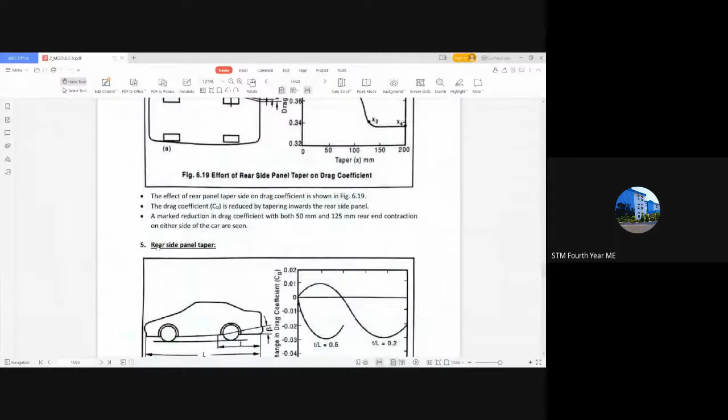Rear side panel taper. To find the rear side panel taper, you have to look at the top view of the car. At the top view of the car you can see there will be an inclination provided here. After the side cambering comes, there will be a small inclination provided at the rear side. It is at the side of the vehicle rather than the rear end, but it is the rear part, and it is the side of the vehicle.

At the side of the vehicle, you are providing a small inclination, and you can see various points provided here: x1, x2, x3, and x4, each showing an inclination. These are the inclinations provided. This is the drag coefficient, and the taper is provided along the x-axis in mm. So x2 is the point at which taper is provided at 50 mm, x3 at about 120 or 130 mm, and x4 at 200 mm.

You can see the coefficient of drag decreases from x1 to x2. At x1, with no taper angle, the coefficient of drag is 0.4, and it reduces to 0.38 at x2, where about a 50 mm taper is provided. Moving on to x3, the coefficient of drag is again lowered to 0.34. Comparing x3 and x4, any further reduction gives a constant coefficient of drag value, 0.34.

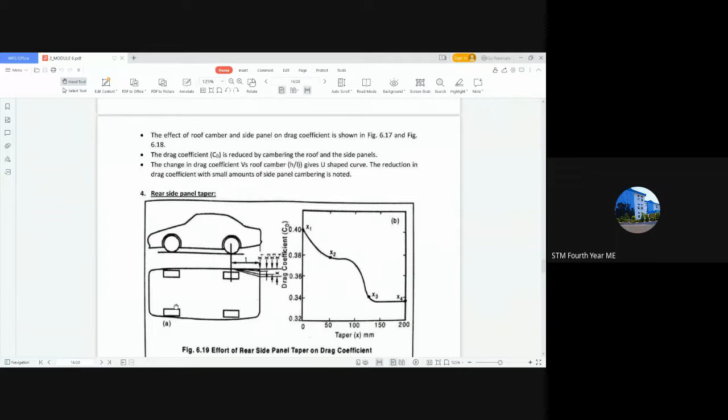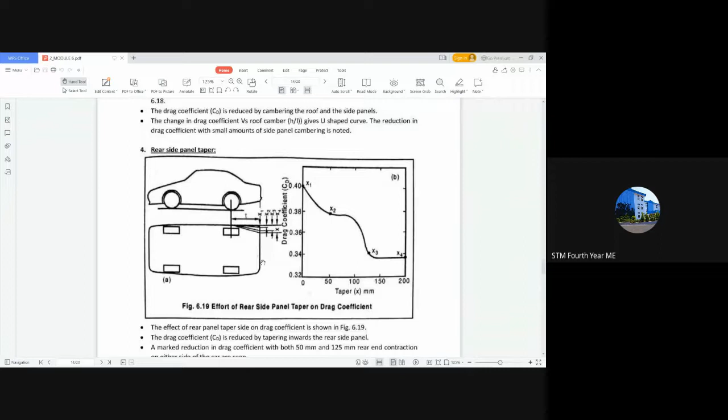That is because of the rear of the vehicle, which we'll discuss next. You can see the area is decreased here, and due to that, base drag decreases. So that is what is affecting rear side panel taper.

Next is the rear end panel taper. This is not a side, it is a rear end panel taper. Rear end panel taper is nothing but providing a taper underneath the car. I'll show you.

So this is the rear side taper. You can see the area that is decreasing here. So here comes the side camber, and after the side camber, the area continuously decreases. There is a decrease here, and a taper is provided here, and here also it is provided. So the area of vacuum pressure that is created behind the vehicle is limited to this length.

So this is the rear side taper, and in the rear end taper, you can see the cross-sectional area decreases here, and after this point, after the rear end wheel, we are providing a taper upwards. You can see an inclination provided here.

So the benefit of providing a taper here is nothing but to increase the negative lift. We have to increase the negative lift. So I have already told you the velocity of the air underneath the car will be very high.

At the front of the vehicle it will be low, and the high pressure region will be created here, but underneath the car the high pressure region is always here rather than upwards the car, and hence it will always provide a lift at the center of the car, while we have to provide a negative lift at this portion of the car also. For that purpose we are increasing the area here.

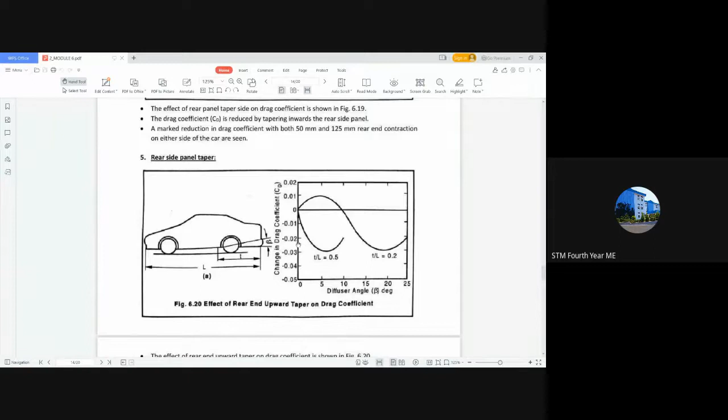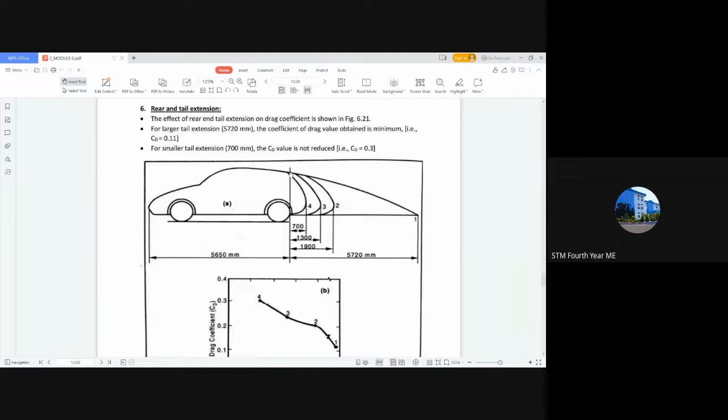We are providing cargo space and all, and for that we provide tail extension as shown in the figure. I will show you another extension. You can see here, this is a form of tail extension, while here the tail extension is much greater. So this is the example for a tail extension, and you can see how CD varies.

Looking here itself, you can see this is the CD at the y-axis, and this is the tail extension in mm. In the first condition, in the fourth condition, you can see the CD value will be much higher, while on increasing it, the CD value decreases.

And at point 1, you can see it will be the most minimum. So what is happening here is nothing but when you are providing no tail extension, the area that is being used for base drag, the area which will be coming under influence for base drag, will be much greater.

So you can look here itself. When there is no tail extension, this is the line that is shown here, and there will be a huge area. But coming to 4, there will be a reduction in that area, 3 a further reduction, 2 another reduction, and at 1 it is 0.

So the 1 is a theoretical concept, and it is not found that much. It is there, but not found that much because it is not ideal for maneuvering the vehicle. But if you are providing it till 1, there will be no disturbance in the airflow. It is in the same shape as that of an aerofoil.

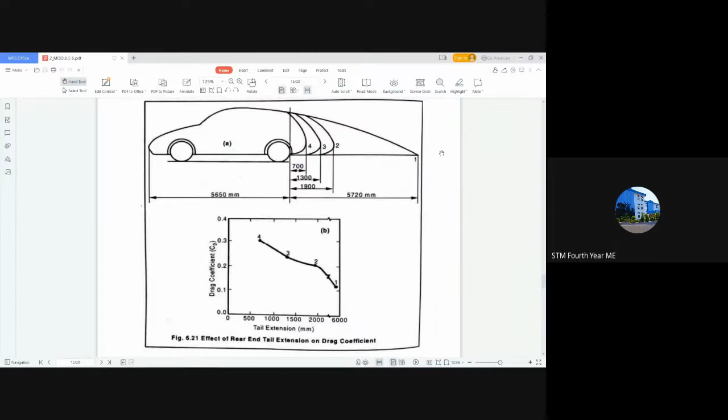And the last one affecting coefficient of drag is underbody roughness. So what is underbody roughness? Underbody roughness is nothing but the various components that are present underneath a car.

If you are looking underneath the car, you can see in conventional vehicles, that is old vehicles, there will be a propeller shaft, differential, the gearbox, and the exhaust pipe, exhaust manifold, catalytic converter, and each and everything is fitted underneath the vehicle.

And air has to pass impinging on all these parts underneath the vehicle. It has to strike each and every part to reach the rear end of the vehicle. From the front end to the rear end, the air has to travel underneath the car, and at each point it has to strike every gap and nook, every hole and cavity, passing through all of that.

So if you are providing such a design, or such a bare exposed underneath part of a car, then the coefficient of drag will be much greater, because the air has to travel by striking at each and every point. But in modern cars, you can always see that every component is mounted above the chassis rather than below it.

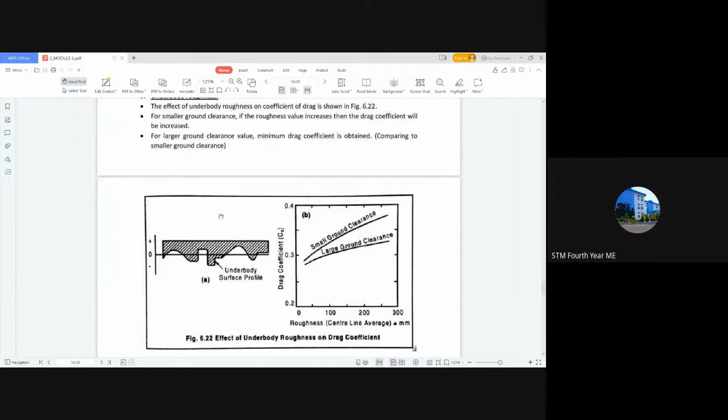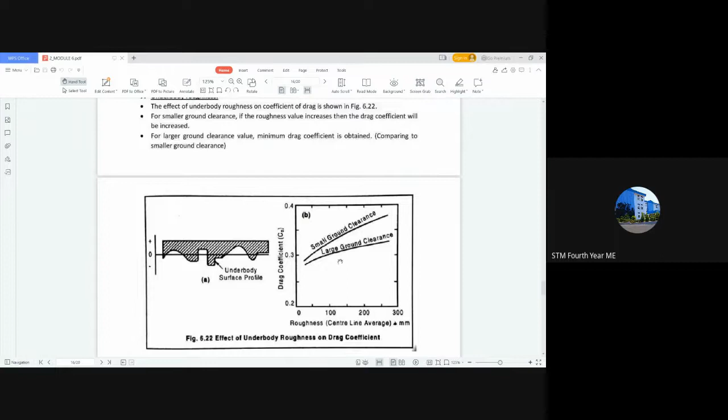So the next topic is about aerodynamic lift control. The last session was on aerodynamic drag, while the next one is on aerodynamic lift control.

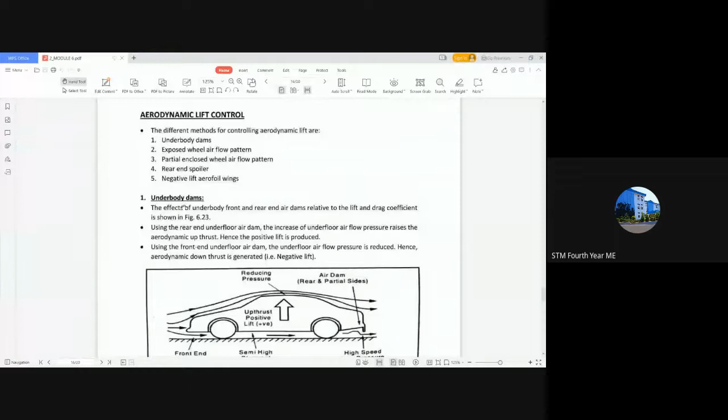The various parts used include underbody dams. So what is an underbody dam? As the term suggests, it is underneath the body, below the body, but it is not underbody roughness, rather dams. So what is the function of a dam?

A dam is nothing but like hydroelectric dams and so on. A dam always prevents something from moving in that particular direction. In the case of a hydroelectric project, it stores the water, or prevents the water from following its natural path of flow, so we are controlling that flow. The same way, we are controlling the airflow pattern, or how the air flows underneath the car.

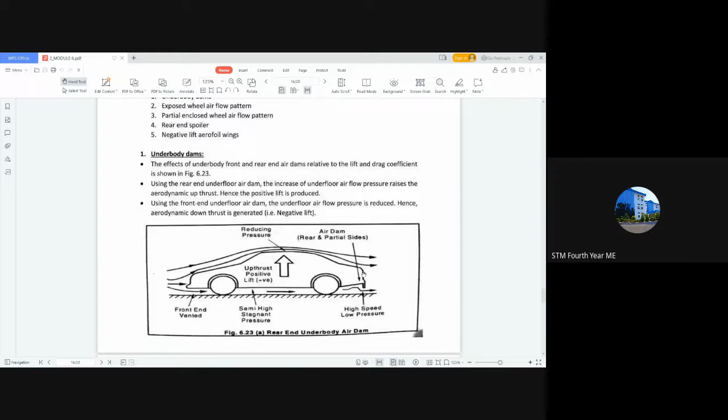So there are two underbody dams that are provided, one at the front end and the other at the rear end. There are two reasons for that.

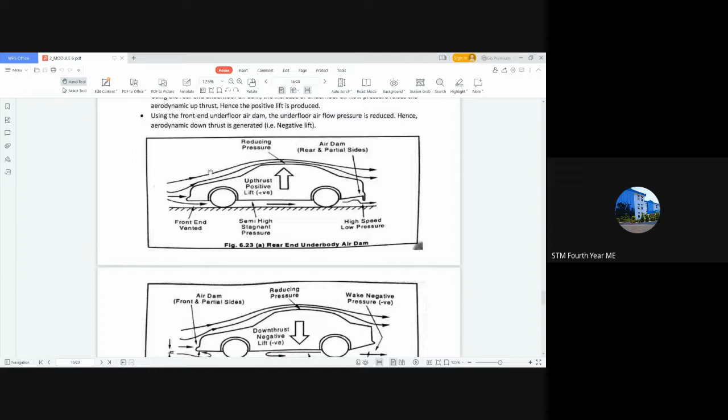At one condition I already told you, in the rear end, if there is a positive lift occurring, it also facilitates the gripping of the front end of the vehicle to the ground. So if there is a positive lift occurring at the rear end, due to this tilting, here it goes upwards, here it will go downwards, and due to that the front end will always be gripping the road. So that is facilitated by the positive lift provided here.

Even if this happens, it doesn't matter, we just have to obtain negative lift at the front of the vehicle. But while tapering the vehicle, we always get negative lift at the rear end and also at the front end. Even if you obtain a positive lift at the rear end, it does not matter.

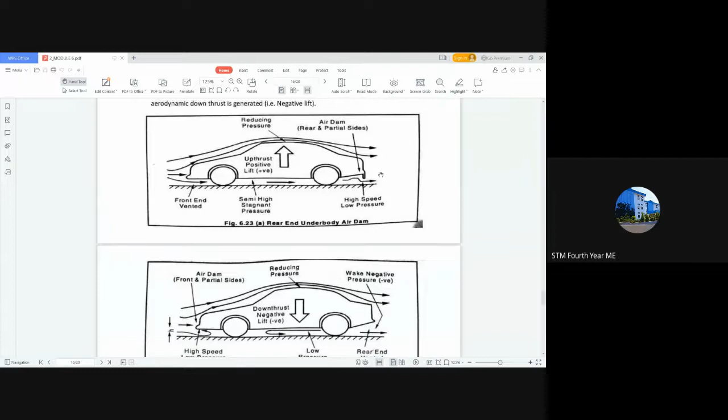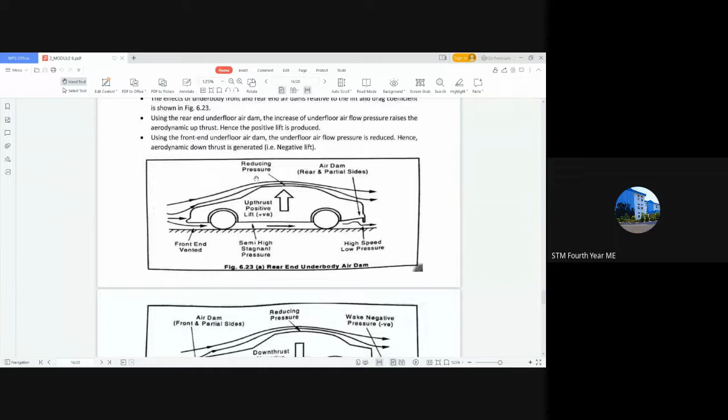And one of the cases is shown here. So we are providing two components here - you can see a bulged section here and another bulged section here. This dam restricts the air entering underneath the car, so it provides the most amount of air to travel over the car, going over the roof of the car rather than underneath it.

When you are directing most of the air above the car, we will obtain higher pressure regions always over the car rather than below the car. That is the function of providing a front end dam. So we restrict that air, and while the air travels here, obviously the velocity will be high and the pressure will be low, but we are reducing the amount of air entering underneath the car.

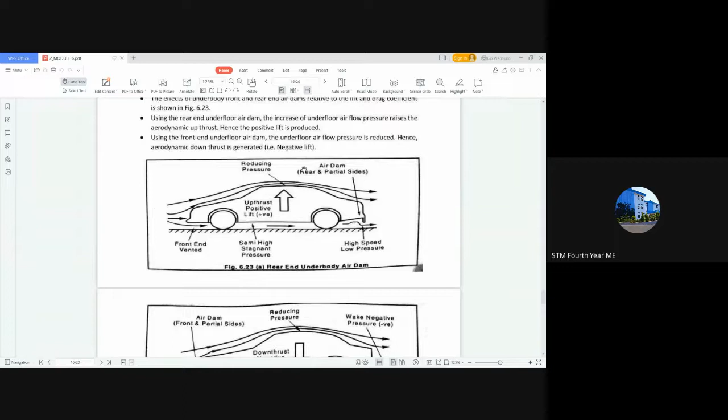Here, for providing positive lift, we are reducing the cross-sectional area, even smaller than this one. So obviously the velocity will be increasing, and a region of high pressure will be created, and a positive lift will occur at the rear. But if you are providing a rear end taper, there will be a negative pressure created here because of the lower pressure here and the higher pressure occurring here - there will be a negative lift.

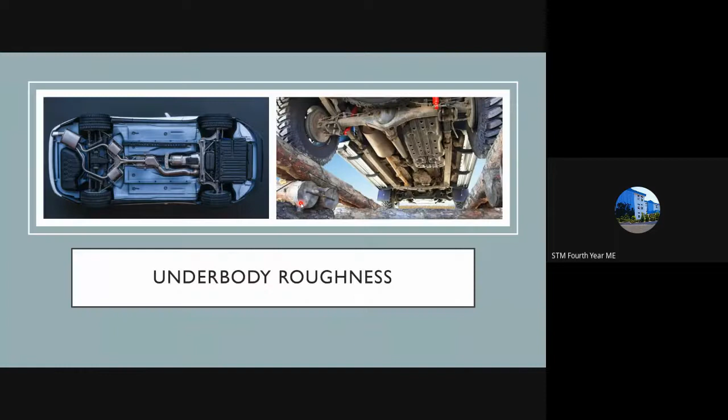So that is how the dams assist in reducing lift. You can see one of the underbody dams provided at the front of the vehicle - this is the underbody dam at the front. This facilitates most of the air to travel upward over the car rather than underneath. Air flows underneath the car, but due to this design, the majority of the air is directed upwards due to this inclined portion provided at the front fender.

So this is one of the underbody dams. And in the case of a taper shown here, that is the underbody dam provided behind the vehicle - such a force occurs due to the lower pressure generated here and the higher pressure generated here.

Okay, one of the components assisting for that is the diffuser. This is the diffuser shown here. If you look at sports model cars, you can see at the rear end there's a component fitted to the car underneath the taper, and this is called a diffuser.

The function of the diffuser is to safely transition the air to the atmosphere. You always know that behind the vehicle there will be a vacuum formed at high speeds, and there will be a turbulent flow. One part of the air that flows above the vehicle comes and falls in this direction, while underneath the car it also forms in this direction, and a region of negative pressure is created here.

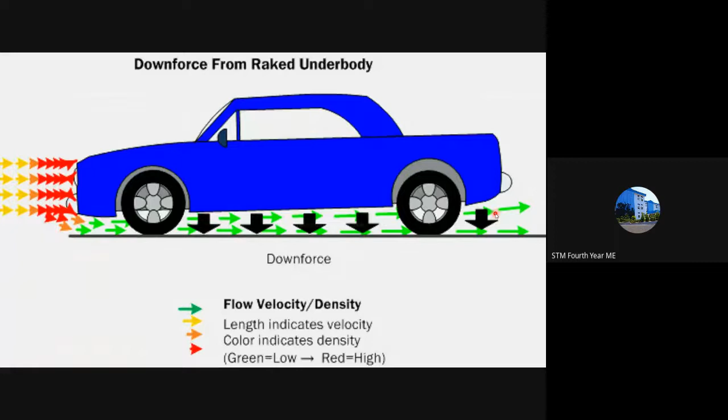For that purpose, if you provide a diffuser, it smoothly transitions the air. At this portion the velocity of air decreases, and we are providing a pathway for that air to move in a safe manner at a lower velocity, to strike the incoming air from the top of the vehicle and smoothly mix with each other. For that purpose, a diffuser is provided.

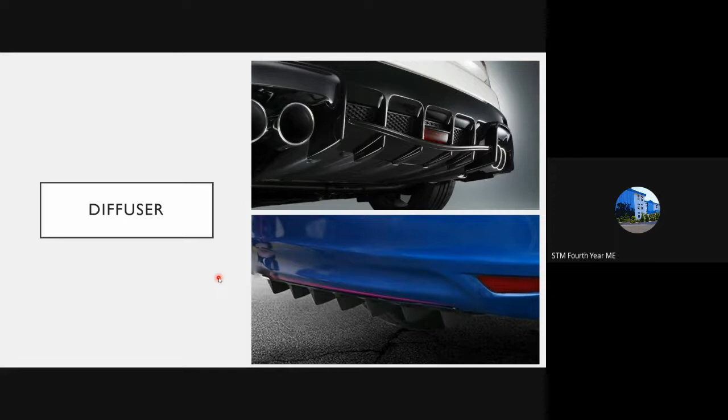So for an underbody dam, we are also providing a diffuser.

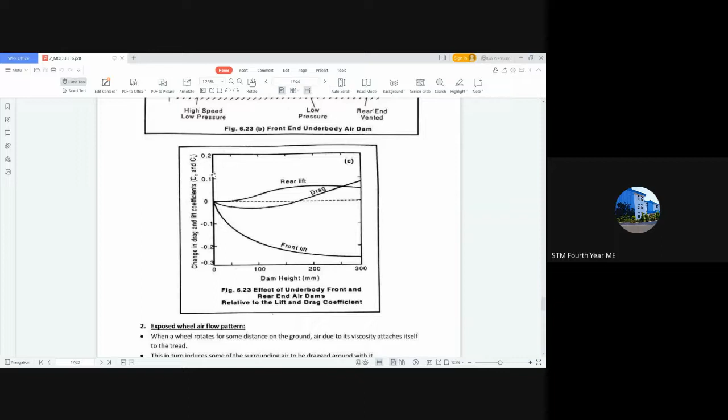Next component: you can see here the drag reduces at this point and then increases, so you can provide a sufficient amount of front dam and rear dam. You can see the front lift is reduced by using a front dam, since the majority of the air always travels to the upward portion of the car rather than the bottom of the car. And the rear lift, you can see, increases.

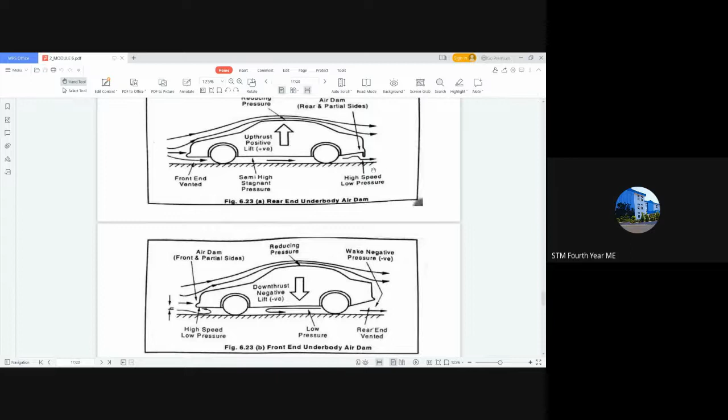Rear lift is increased in this case because a positive upward thrust is formed, while in this other case it is reduced, and you can see it reducing here, a small reduction. That is when using a diffuser. And a major portion, when you taper this, this portion is for the taper, and for this reduction we are using a diffuser, to reduce the rear lift.

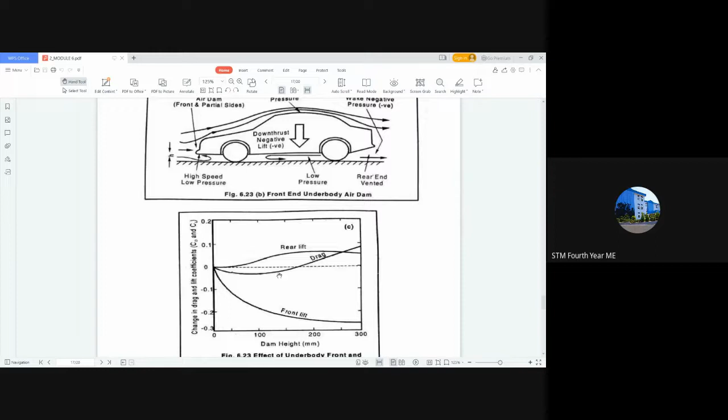So that is what comes under underbody air dam. Next is the exposed wheel airflow pattern.

In the exposed wheel airflow pattern, you have always noticed that the tires or wheels provided in a vehicle are always open wheels. The purpose of providing open wheels rather than enclosed wheels is for the air to travel safely outside - you send the majority of the air encountering the front without restriction smoothly to the sideways rather than underneath the car. If you send it underneath the car, a region of high pressure will be there and lift will occur. To reduce that, we are providing open wheels.

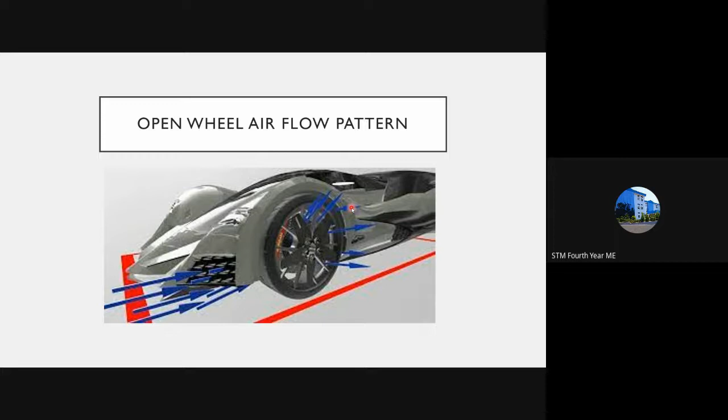In an open wheel condition, this is how the flow occurs. This is a Formula One car, and you can see the air striking the front nose end of the vehicle is then transferred to the atmosphere through the open wheel pattern. So this is how it flows in an open wheel pattern, when we are looking from this direction.

If we look from the front end, there is also a possibility of the air going underneath the car to rotate in this manner due to the rotation of the wheel. So there are two patterns of airflow: first through the open wheel, and another inside the enclosed space of the tire.

So you can see the tire always rotates in this direction, in the forward direction. So it carries a small amount of air in this manner also, and it has to be safely ejected here. You can see, so there will be a design or a pathway provided at this portion of the vehicle to safely produce a small vorticity.

So you can see there's a vortex formed here, and by this vortex or turbulent motion, the air exits from this point. But the majority of the air entering the vehicle, rather than going to the tires, will go underneath the car. So the wheel is only exposed for a small area at the front of the vehicle. The rest of the air always moves underneath the car.

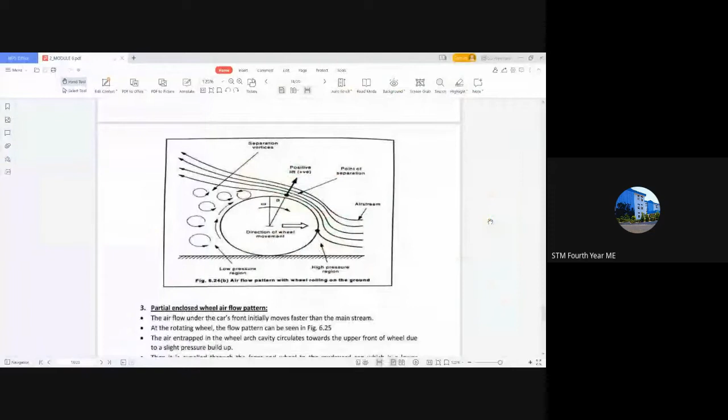So this is how an airflow pattern occurs. This is an open wheel airflow pattern, while this is the enclosed wheel airflow pattern, and that is the partially enclosed wheel airflow pattern which I have discussed.

So when you are looking at the top side, you can see how the turbulent flow is occurring. This is how the turbulent flow occurs here. So once it exits, the vorticity that is formed here is in this manner.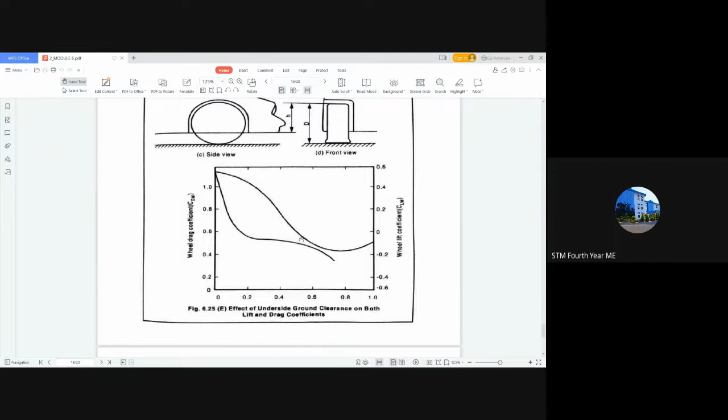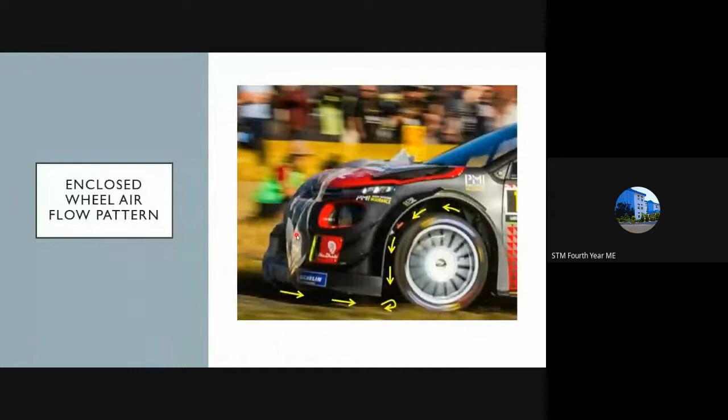And that spoiler, due to this shape, will produce a higher pressure on top of the car rather than below. It provides a higher pressure here due to the high velocity flow, and then there will be a region of low pressure here, and due to that a negative lift is formed at the rear end. That is the function of the spoiler.

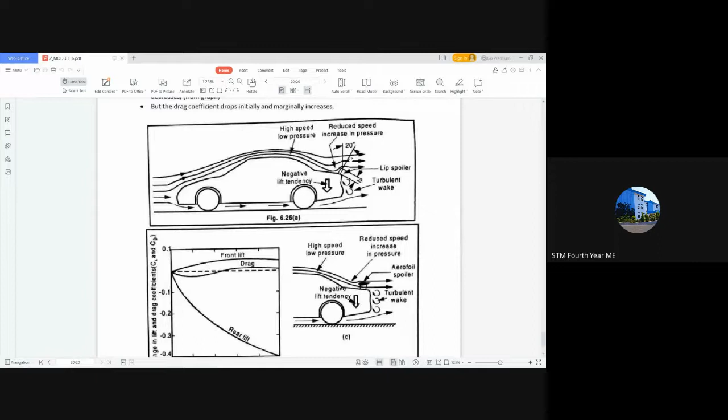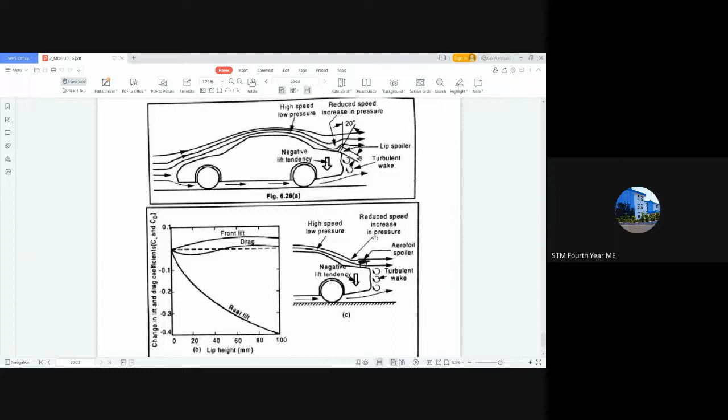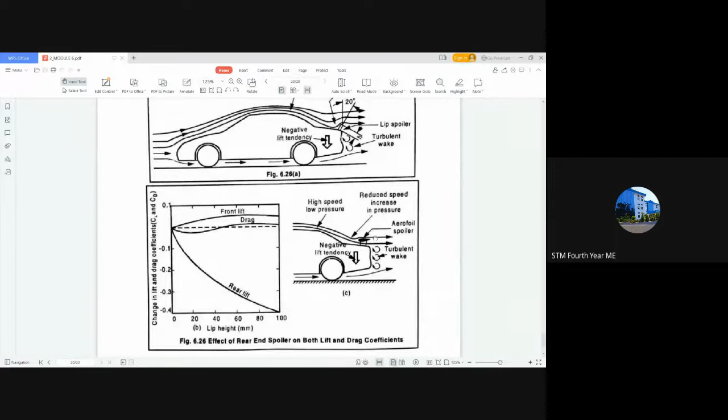And according to the degree of inclination, if we are looking at a retractable spoiler, it can bend in different axes. So if you bend the spoiler in the downward direction, there will be a positive lift occurring rather than a negative lift. But if it is bent upwards in the shape of an inverted aerofoil, then we are obtaining negative lift. That is the manner in which the retractable spoiler works, and such a method is used in sports cars for easier maneuverability, using negative lift aerofoil wings.

This is provided because once the vehicle attains a certain speed, it will obviously tip over, and to reduce that, or to provide negative lift at the rear end, these wings are used. So it ensures that negative lift is always formed at the rear end of the vehicle. For that purpose, negative lift aerofoil wings are given.